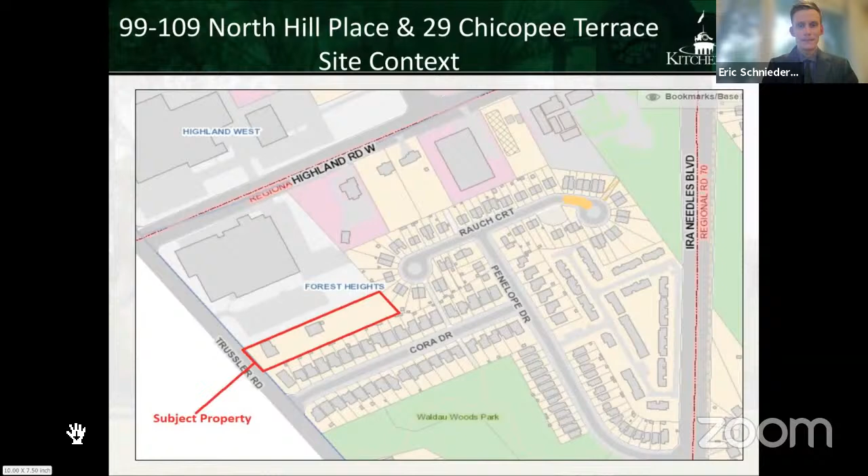The next slide shows the draft plan of condominium. The owner of the subject lands is proposing a vacant land condominium that would consist of 5 units to be built with single detached dwellings. A private road, sidewalk, and landscaped areas would make up the common elements. This residential development, consisting of 5 single detached dwellings, is permitted on the lands as per the policies in the city's official plan and regulations in the zoning bylaw.

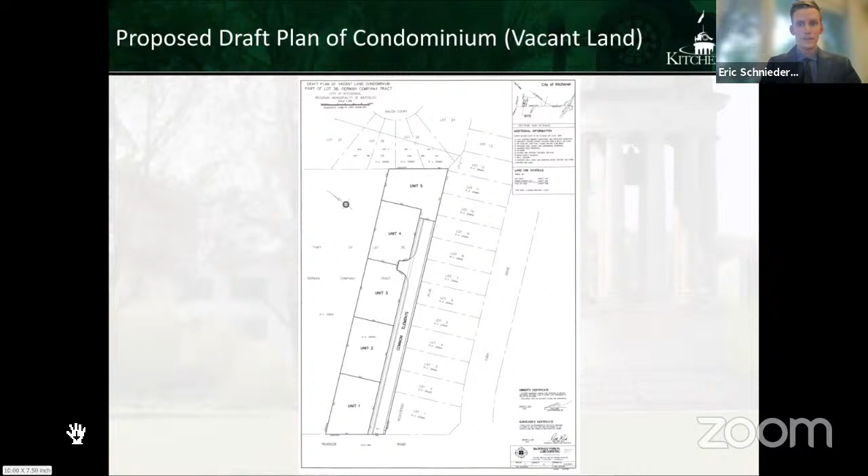The purpose of this application is not to determine permitted use, as single detached dwellings are permitted in this zone. Rather, the purpose of this application is to permit the individual ownership, the tenure of each of the residential units. On the next slide, the proposed site plan is shown.

Through the circulation process, residents on Cora Drive expressed concerns about privacy as the drive aisle is proposed to abut their rear lot lines. The residents requested that rather than a 1.8 meter, 6-foot high fence that would be required to screen the drive aisle, a 2.44 meter, 8-foot high fence be erected instead. The applicant has agreed to this increased fence height, and it will be addressed through the landscape plan during the site plan process.

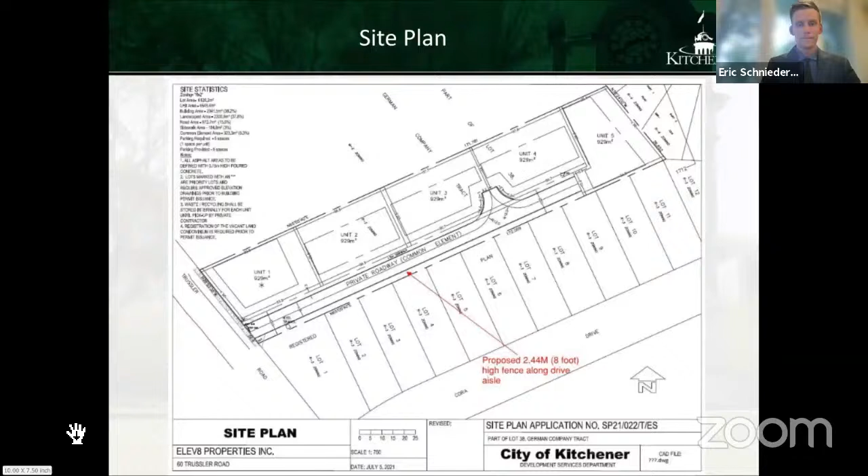On the next slide, I'll offer concluding remarks. The proposed development conforms to provincial, regional, and city plans and is compatible with surrounding land uses, represents good planning, and as such, staff recommend that the draft plan of condominium be approved subject to the conditions outlined in the staff report. If there are any questions, I'm available to answer them at the appropriate time. Thank you.

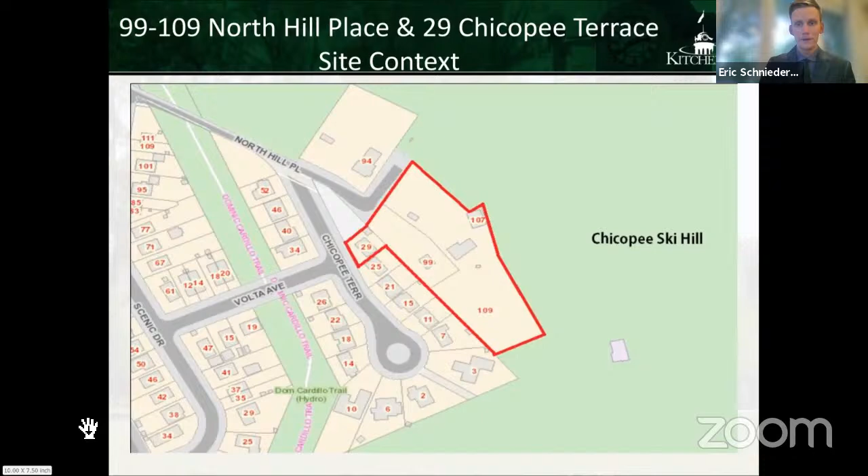The owner of the subject lands is proposing a vacant land condominium that would consist of 14 units to be built with single detached dwellings. A private road, sidewalk, retaining walls, and landscaped areas would make up the common elements. The residential development consisting of 14 single detached dwellings is permitted on the lands as per the policies in the city's official plan and regulations in the city's zoning bylaw.

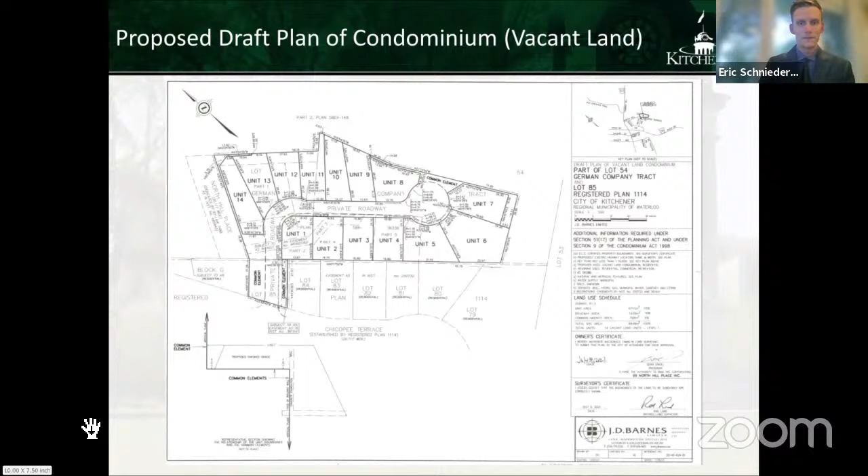Again, the purpose of this application is not to determine permitted use, as single detached dwellings are permitted in this zone. Rather, the purpose of the application is to permit the individual ownership, tenure, of each of the residential units. On the next slide, I'd like to give some background on the progression that staff and the applicant worked through on the design of the site.

The original submission proposed a sidewalk that would run alongside the neighboring existing home at 25 Chicopee Terrace. This was identified during public circulation to be a cause of concern regarding privacy. There was also no pedestrian connection provided to North Hill Place.

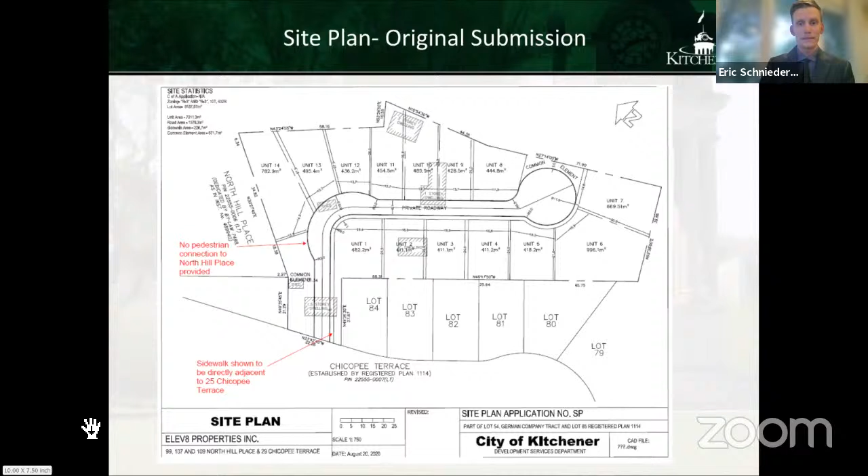On the next slide, the second submission addressed these problems. By switching the sidewalk to the opposite side of the drive aisle, which does not face a residential lot, a pedestrian connection to North Hill Place was also provided. However, the lot boundaries had been rearranged, which resulted in Unit 5 having its side yard face the rear yards of the existing homes on Chicopee Terrace.

This was identified as an issue as it meant that a future building could be as little as 1.2 meters or 4 feet away from the rear lot lines of the residents on the north side of Chicopee Terrace.

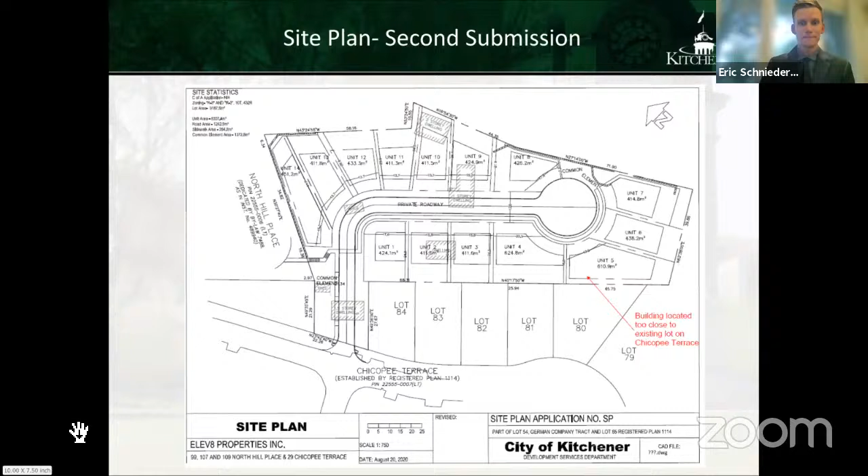On the next slide, the final submission shows that the lot fabrics have been again rearranged, but this time to ensure that only backyards would face the existing lots on Chicopee Terrace, which would now provide a 7.5 meter or 25-foot minimum distance that a new building could be placed from the rear lot lines on Chicopee Terrace, rather than 4 feet. Staff are confident that the building separation proposed for these lots is consistent or better than typical residential development in the city of Kitchener, in which most backyards face other backyards in residential areas.

In addition to the initial conversations that staff had with residents during the circulation period, last week, city staff, Ward Councillor Schneider, and the owner met with residents on site to answer questions and discuss the proposal. Issues raised included traffic, privacy, nuisance, and disruption during construction.

Staff have worked with the applicant to address these issues, and as a result, the applicant has agreed to the following measures: locating light standards on the side of the road furthest from existing homes and shielding light to prevent light trespass, regrading to capture the flows that currently exist on the adjacent property on Chicopee Terrace, and demolishing the current homes as soon as possible to limit trespassers and vandalism.

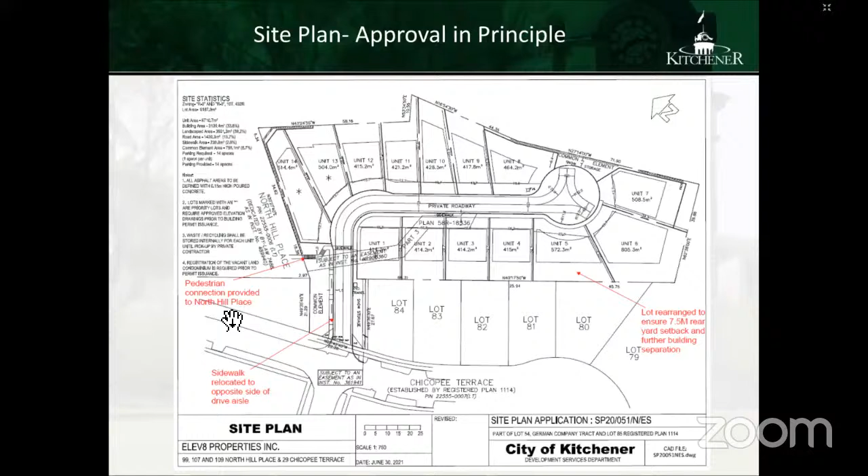Also, there is a huge walking path that cuts through the hydro line here - it's a city trail - and now at least 28 cars, because we've been told by the developer that there will be 14 homes with 2-car garages in them. Also, council, I've been informed that there's no parking on that street up there that they're developing. So if somebody has a 50th anniversary party, everybody who knows that couple, their family, will be parking on Chicopee Terrace and the surrounding streets, because there's no parking on this new development.

Also, have they done an environmental study on this land? Because I know that it's all well water back there, nothing has been plumbed in for residences, and these wells are probably pretty old.

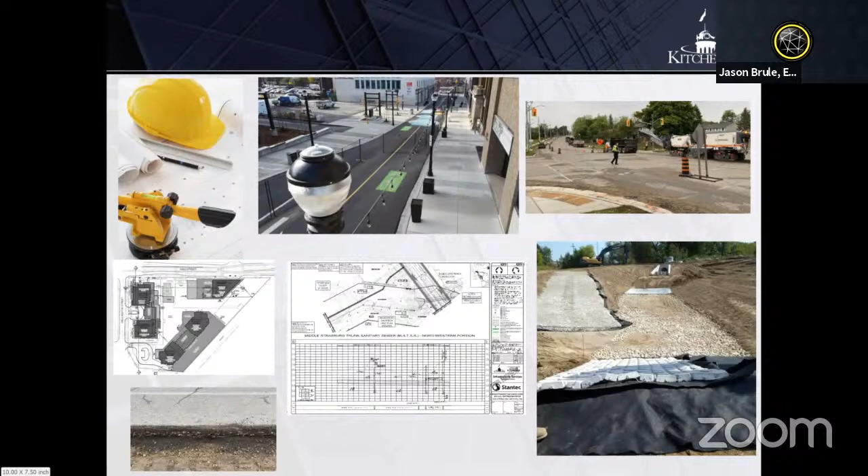Thank you, Chair Singh. Good evening. My name is Jason Brule, an engineering technologist on the development engineering team in the Development Services Department. I'm going to present the City of Kitchener Development Manual update for your consideration and approval. The Development Manual is a highly specialized and technical document that guides development and construction within the City of Kitchener. It's nearly 200 pages of standards, specifications, and administrative processes, primarily used by consulting engineers, contractors, landscape architects, and to a lesser degree planners. The manual provides direction required to achieve development approvals, acquisition of building permits, and aids in overall successful construction. Depicted are various stages of the process from drawing to construction.

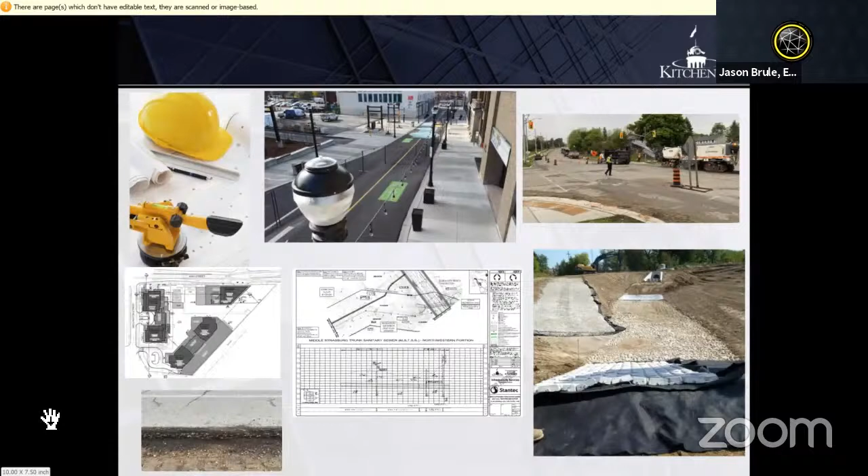Until 2010, the city utilized its subdivision manual as the reference document for development works. It was a collection of standards and guidelines from multiple departments that shaped the city.

In May of 2010, staff took to council the first version of the development manual. It provided a comprehensive overview of the administrative procedures for development applications. It also updated obsolete standards and specifications to make it current. Technology changes or shifts in industry compel us to review and update our standards periodically. Today's update is doing just that.

Today's updated version of the development manual received input from multiple internal and external stakeholders. External included the Grand River Conservation Authority, Kitchener-Wilmot Hydro, the Waterloo Region Home Builders Association, from whom we had a working group with members of the Kitchener Development Liaison Committee, local consulting engineering firms, and surrounding municipalities. We also received input from as far away as Portland, Oregon, and San Francisco, California, with respect to our typical cross sections and our incorporation of low impact development into them.

Many city departments were consulted in the update process. These include building, engineering, construction, engineering, design and approvals, planning, environmental planning, Kitchener Utilities, gas and water, sanitary and storm utilities, operations, parks and cemeteries, operations, roads and traffic, and transportation.

Three major projects that shape how the city administers construction, both new development and reconstruction, were completed from 2016 through 2019. These include the Integrated Stormwater Management Master Plan, the Urban Design Manual Update, and Complete Streets Guidelines. The outcomes from those documents have been included in the 2021 version of the updated manual. Ultimately, those plans and guidelines spell out what is to be constructed, and the development manual tells us how to do it.

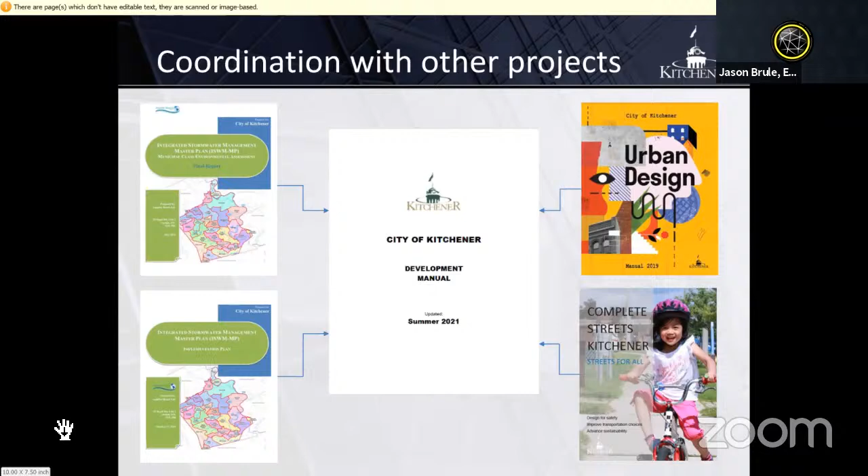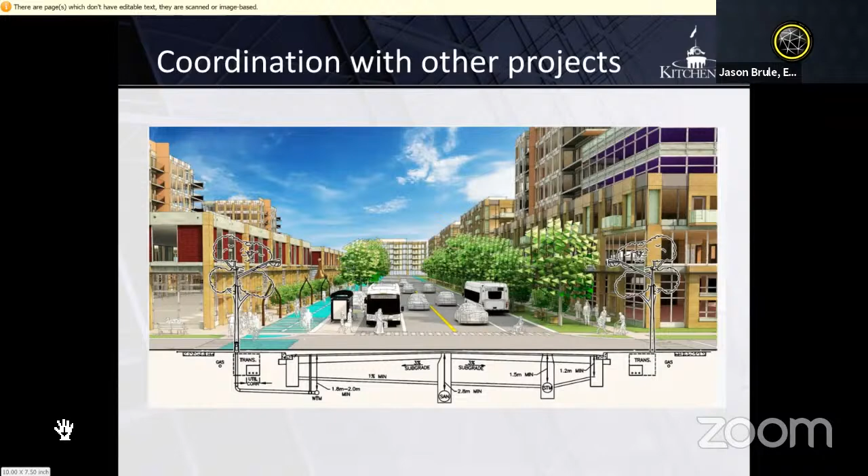The areas outlined in the dashed magenta colored line indicate the scope of the Urban Design Manual. It's focused on the built form and site design of the private development along the street, but also works to address the streetscape, pedestrian experience, and other factors, to create a well-designed public realm.

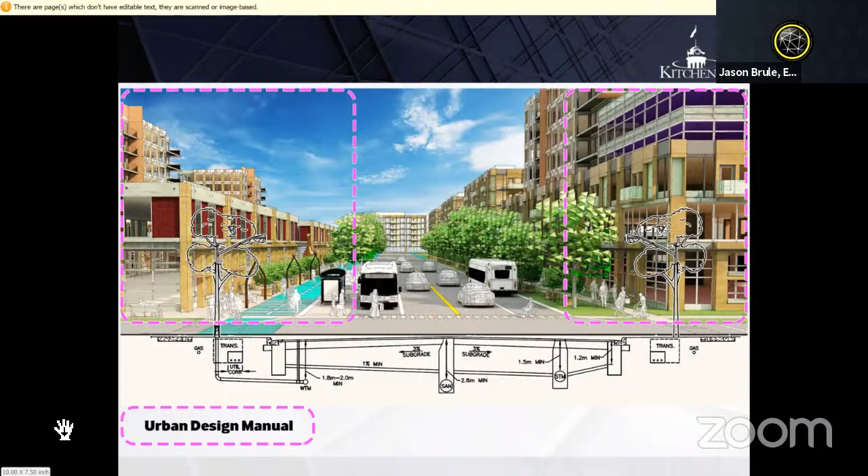The area surrounded by the dashed green line encompasses the extent of the Complete Streets Guidelines. They provide new design standards for new streets and reconstructed streets, with guidance on all forms of transportation and street features within the right-of-way.

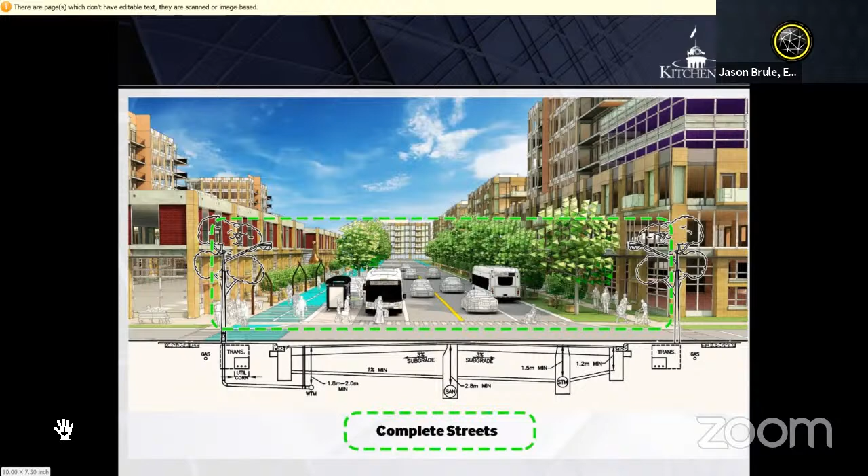The development manual, the area shown here in the cyan dash line, provides the technical standards for all infrastructure, utilities, stormwater management, lot grading, and more. It is the guiding document for subdivisions, site plans, and streets.

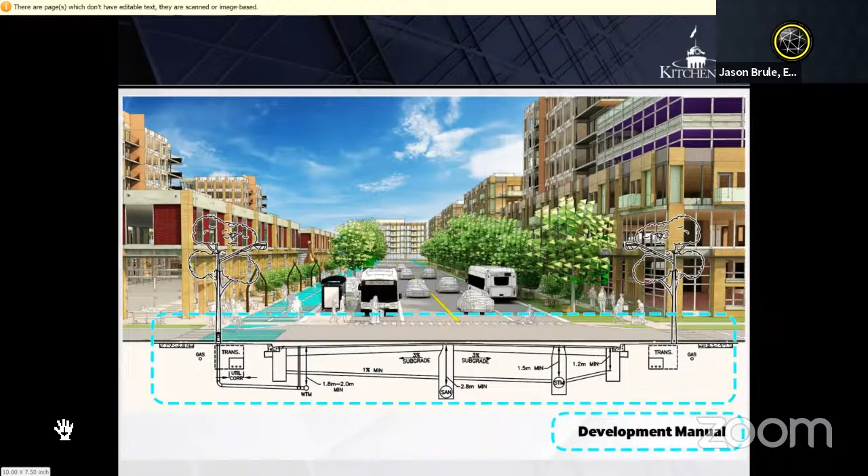Combined, it looks something like this. Each project has its area of focus and expertise, and where elements overlap, we coordinate to ensure the best possible outcomes. The development manual plays an important role in the others, as it is the glue that holds it all together. Coordination of the servicing, or the interface of the grading between the site and the right-of-way, are key elements of the development manual.

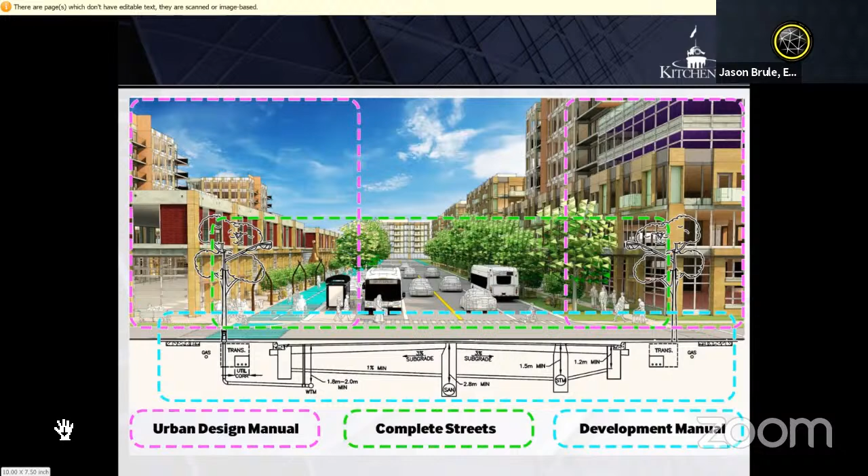Solicitation for comments began in February of 2017. It was a general request for any changes or tweaks proposed by all the various stakeholders. A working group of city staff was assembled to review and contemplate all the requests received. After the initial changes were made, four other circulations took place. This allowed for refinement of not only the changes being requested, but also the document itself. It also ensures that the comments received were understood correctly and implemented as intended.

Shown here are screenshots of some of the tracking sheets developed to organize both the comments received as well as responses to them. A three-phase hierarchy was established and color coding was applied to make this evident. Traffic signal lights were the inspiration for the color coding. Red means that the requested change was reviewed and considered, but is not being implemented in the manual. Yellow comments, although not being implemented in this version of the manual, remain intriguing, and more debate on their validity for future updates is still being considered. Finally, green are those that are agreed with and have been included in this update. It is important to note that all requests were given proper consideration, and responses to each of them are included in these sheets. These were then circulated to the stakeholders for transparency in the process and to provide them with reasoning as to why something may not have been included.

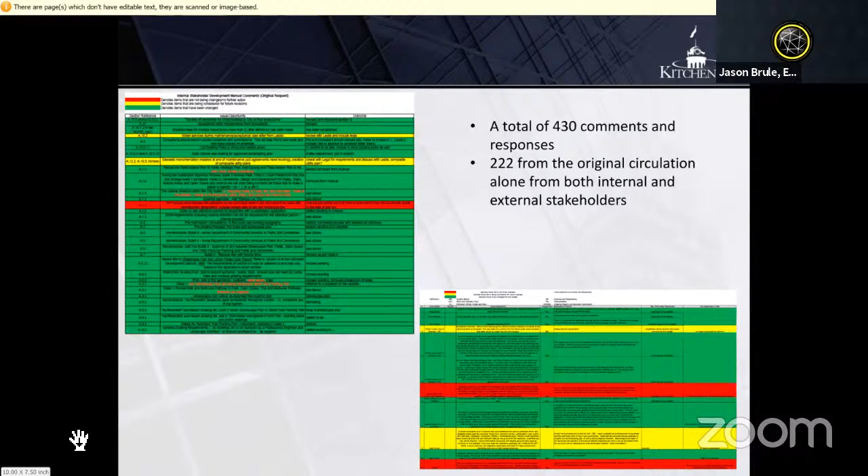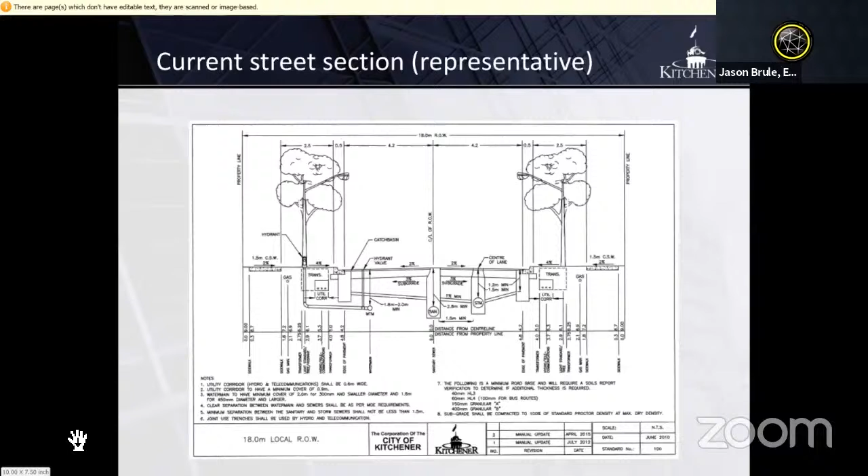The best way to graphically show some of the biggest impacts and culmination of the updates provided are through the city's typical cross sections. This is the current approved typical cross section for a local street found in residential neighborhoods, providing access to properties throughout the city. A lot of the issues and opportunities shown in this drawing are carried through the other typical sections we have for various street classifications. Note the width of the lanes, the width of the sidewalk, the lack of stormwater management solutions, and pavement composition. These have all been addressed through the update process and the integration of the standards from the various new city initiatives.

Although they appear extremely similar to the existing cross-section, there are some significant changes that need to be pointed out. Working from the top down, the first noticeable change is the width of the paved surface of the road. The lane widths have been narrowed, which has positive impacts on both traffic calming and stormwater management, as reduced hard surface means reduced runoff. This also yields larger boulevard space, which supports tree growth and health. The next difference to note is the width of the sidewalks.

The increase in size from 1.5 meters wide to 1.8 meters wide, about 1 foot, may seem small, but is a significant change for how pedestrians, including those in mobility assistance devices, are able to navigate their neighborhoods safely.

The underground infrastructure also received updating. The biggest change comes from the introduction of low impact development, or LID, into our streets. Storm sewers allowing for exfiltration of stormwater into the existing soil beneath it. This is of course dependent upon the location of the street and any potential site-specific constraints that could prevent the implementation of the LID component, such as high groundwater or soils that are not conducive to infiltration.

It should be noted that even if the street has these constraints, this section is still utilized. The storm sewer just behaves as it has prior to LID, but the other important changes to the section are still implemented. The final thing to point out is the road base composition.

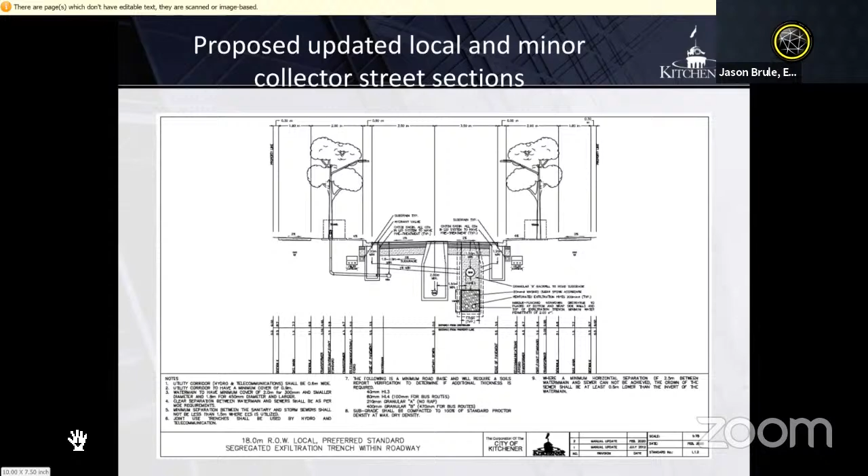The values for base asphalt and the granulars, or the stone underneath, are greater than the existing section indicates. These were increased to support structure number, a value used to determine the efficacy of the road, such that it is at its required strength while still at base asphalt. This will translate into better roads being assumed by the city in new development and increased longevity in the lifespan of new roads. Next slide, please.

This alternative can be utilized where soils are very conducive to infiltration for the various street classifications. The biomedia area in the boulevard will promote infiltration of runoff within the boulevard and will pre-treat any flow that exceeds the boulevard's ability to infiltrate, as it will be then sent back to the gutter and into the storm sewer. Next slide, please.

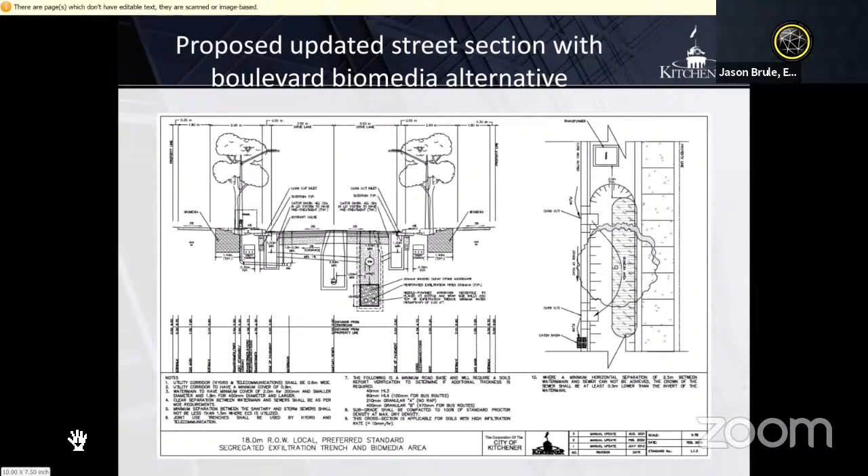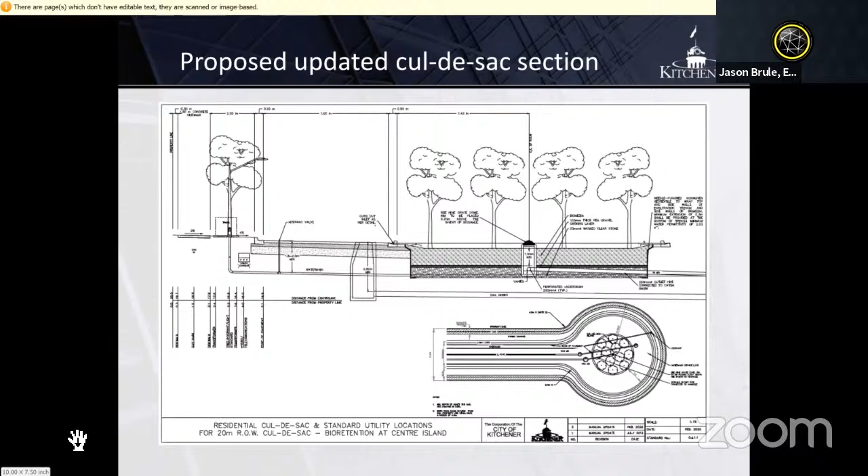So through this update, 3 other important city documents have been brought together. Initiatives from safe pedestrian and resident mobility to implementation of low impact development has been achieved. Further, city standards and specifications have been updated to current best practices. It must be noted that collaboration with industry stakeholders and city staff was invaluable in this exercise. Next slide, please.

Thank you for your time.